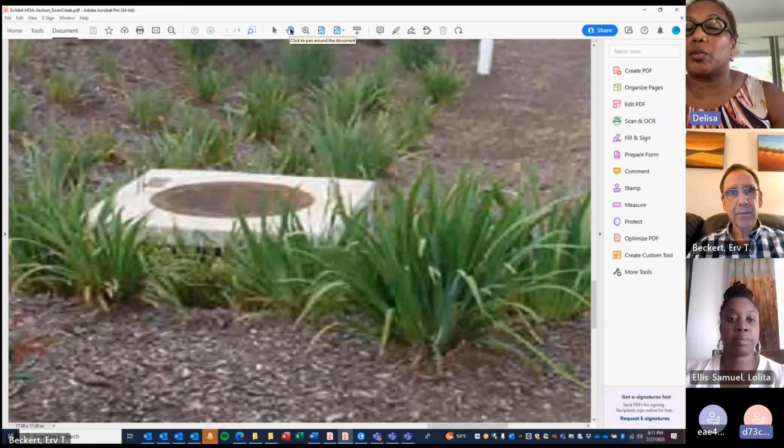Is everything completely sub-ground level? Is there anything that's going to be above ground? Because as the water comes into this collection pond, is there going to be the possibility of any type of debris accumulating there — runoff from the top, if everything is coming into the ground — is there the possibility of debris coming above the pond area?

You did break up a little bit, but I did get the intent of your question — you're asking if, as the water flows in, will there be any possibility for debris to capture in the device. The answer is no, because what it's collecting is water coming from the storm drain system, normally collected from your curb inlets along the curb. So very rarely do we have debris in a roadway system like this.

Now, we do get a lot of debris in storm drain systems that are near a rural area, a rural section, but we do not have that issue with this kind of system because it's only capturing water coming in from the curb system here. That's its intention. It's capturing water off of Fort Washington Drive, and it's also capturing water that's been captured in the storm drain system that we're conveying.

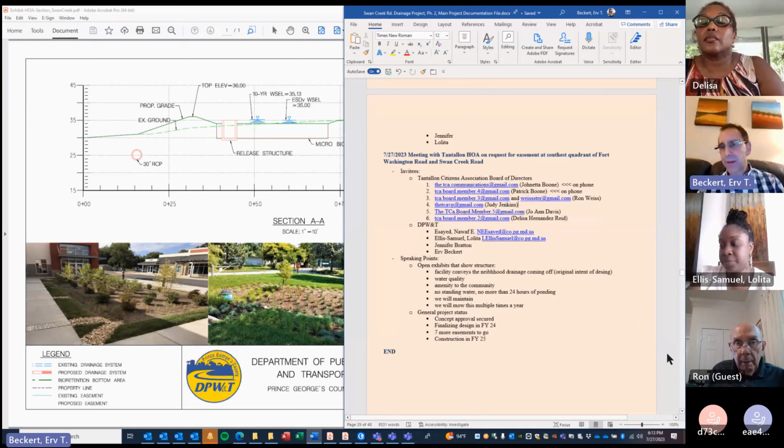All right, so we have gathered here. I'm going to run through the list of folks we have. So we have Miss Johnetta Boone, Mr. Patrick Boone, and Delisa Hernandez Reid, and of course Ron Weiss has just joined us, and also gathered from DPW&T we have Lolita Ellis Samuel. Lolita Ellis Samuel is our right-of-way agent, has been meeting with the property owners and working on acquiring the easement.

So what I was doing, Ron, just before we got started, was showing a picture of the proposed micro bioretention pond. It's a very small facility, about 3 foot in depth, and it is going to collect water at the surface. It will then infiltrate, trickle down through the layers of soil, and it will remove sediment, phosphorus, and nitrogen.

And there were some questions asked: will there be a smell and odor coming from this? And I said no. The treatment that we do occurs down below. We're simply removing phosphorus and nitrogen. We're using existing soil, a variety of different soil types, but this all occurs below the surface. You don't even see it.

The top surface will just be grass. It will literally look like a slight depression off the side of the road. So these are very nondescript facilities. They don't stand out much, which is the way we like them, because they blend well into the background. And we are and will be responsible for maintenance.

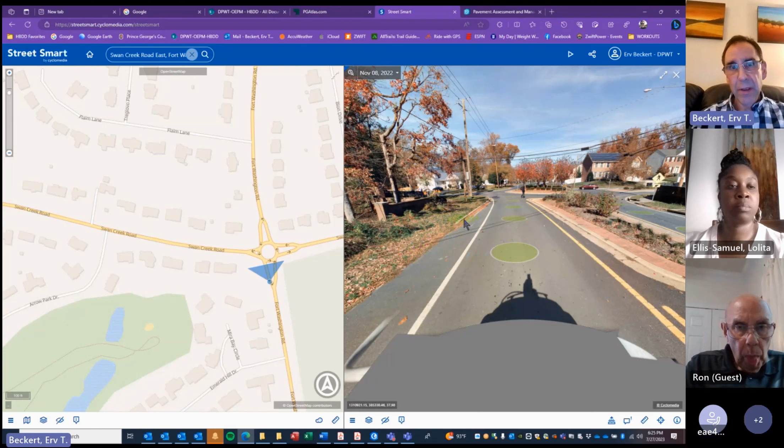The school was required to, and I believe they did do this, provide controls on their property to address drainage impacts from their project. They did so because they have to follow the very same regulations my agency needs to follow. Well, sure, there may be some water that comes from that site because we're right next to the school, but that was not the intent of this structure. They have already provided substantial controls on their property - I believe they put on-site stormwater management facilities there.

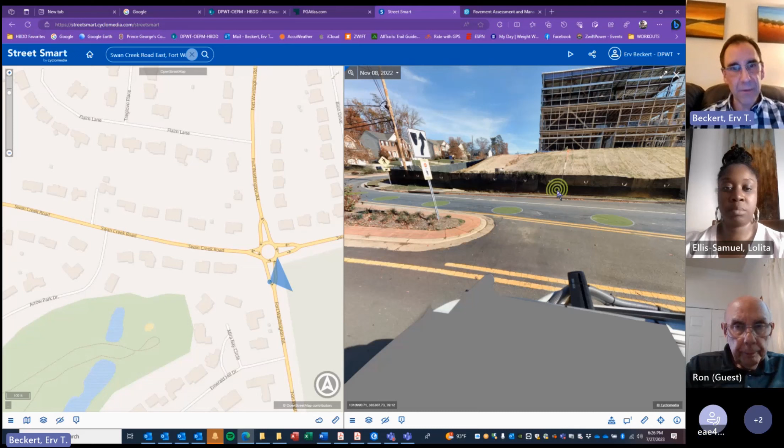What that should have done was address any changes in flow, because you're right - when you clear an area, you open it up and the water concentrates more quickly, and it can overwhelm a storm drain system if it's not captured before it's conveyed. So they were required to provide stormwater management facilities. So what we're doing is... If I could just jump in there. Sure, please.

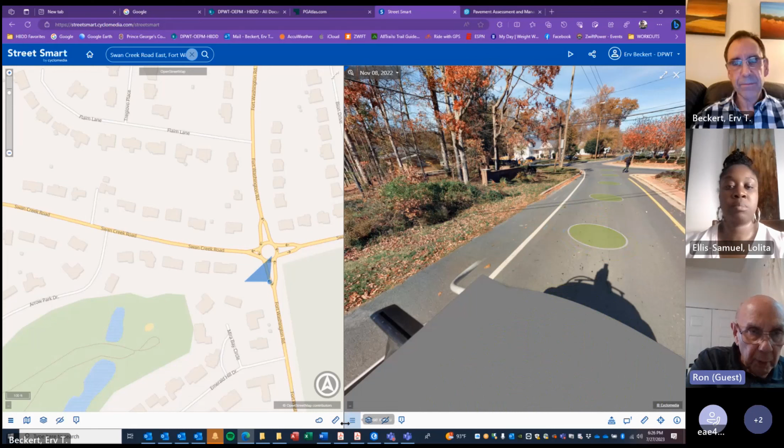They have big underground storage tanks to hold a surge of water, and those tanks drain into a big pipe that goes under Fort Washington Road, behind the houses on the south side of Swan Creek Road, into that pond. That pond behind Flavia Walton's house has been reconstructed to accept the water that drains out of the underground storage tanks.

You'll see those white lines - no, those aren't it. But just south of the triangle extension of the traffic circle, there's a pipe that goes behind our property, probably on the property line, behind those houses, behind 102, and drains into that pond. So the majority of the water coming from that school will flow under Fort Washington Road through that pipe into the pond.

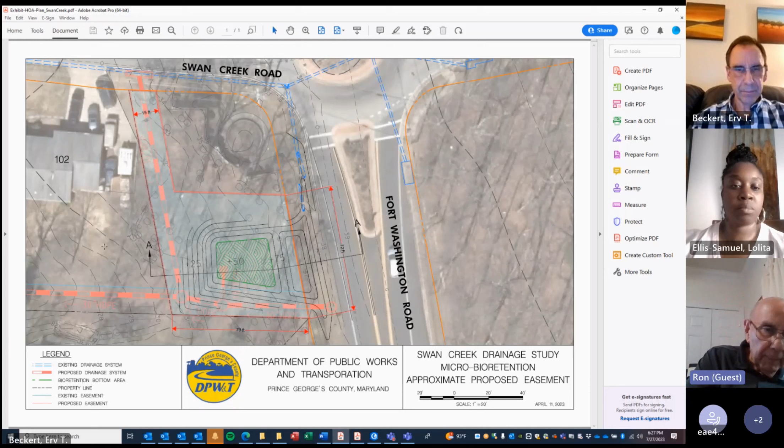One point of clarification, Ron - the water that comes from the school, that goes into our pipe system, does not go into the pond at all. It bypasses it. I'm hovering over it, and I'll change my cursor so you can see it better. You see this pipe here? That is capturing all that water. It does not discharge into this pond - and I'm not talking about that pond, I'm talking about the golf course pond.

Oh yes, sir, understood - I'm not even thinking of that. What you're thinking is the bioretention, yeah, that thing. I'm not calling that a pond, that's your micro thing.

So the water from the school is in fact going under Fort Washington Road into the golf course pond that has been reconstructed to accept that water. Is that true? That is true, sir, yes.

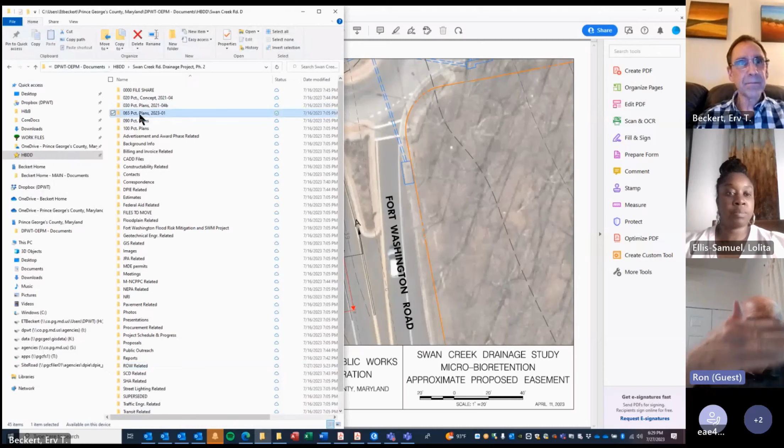Thank you. So this pond has to do with water flowing south from the Tantallon North area, flowing down to the houses on Tantallon, the houses on the north side of Swan Creek Road, and the houses on the south side of Swan Creek Road.

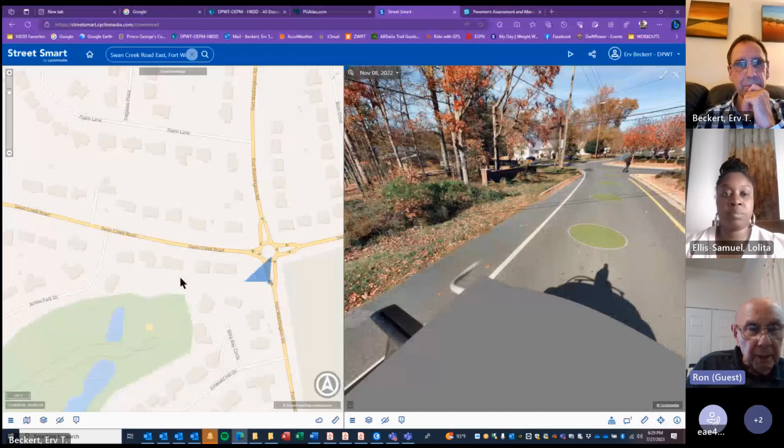Those houses have multiple times had severe flooding and have had to reconstruct their basements. The one house across the street from 102 is now built on stilts to hold it up above the water flowing under their homes. 109, the house at the end of Arrow Park, was ruined and has been rebuilt almost from the ground up because of the flooding that Erv is trying to mitigate with this system. This will certainly have that impact.

Thank you very much, Ron, that was a very good summary. I hope that addresses the question adequately about why we're putting in this facility in relationship to this project, and the context of the school site with the storm drain system. Are there any questions about that at all? Anything I can do to answer, or did we not answer any questions properly before?

I have a question about maintenance. So when you put this system in, there's an installation project - how long is it going to be in place before it has to be replaced, or how are you monitoring the life of this system that's in place? I'm thinking about pipeline projects, something I'm familiar with.

Gotcha. Yeah, so these kinds of systems, because they're underground, we have to go off of empirical evidence for when we repair them. So when I said we repair them between 5 and 7 years, that's when we intend to do it, just because that's the historical life cycle of these structures. It's very difficult to know exactly what's happening to your soil layer below.

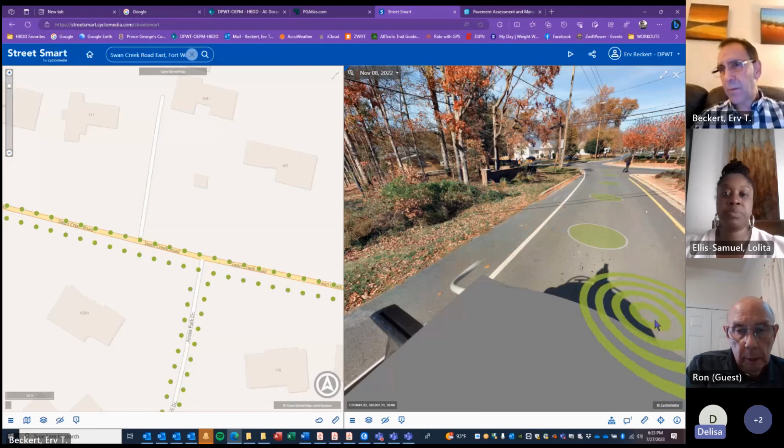So that's why we can say pretty confidently that we will be able to allow that system to work for 5 to 7 years, and then we're going to go in and replace the soil. Does that answer the question? It does, but it also causes a follow-up question - so how...

How much of a construction effort is this for the initial installation? And perhaps, I know we can't say with any true confidence, about repair and having to go in and replace that soil area. So how much of a problem is that going to be?

The first installation will take the longest. The area needs to be cleared and graded, so that's by far the most time consuming part of constructing this. It'll take about 2 months to build because we have to grade it, stabilize it, establish soil and sod, and put in that structure at the downstream, low end.

But once it's built, the maintenance, the replacement of the soil that we would do in 5 to 7 years, that's a much easier effort because by then all the hard work has been done. We just have to drive in there with an excavator, dig out the soil, put in the new soil, then seed and straw, cover it with mat so the soil and grass has a chance to reestablish itself. That only takes a few weeks, probably 2 weeks work at the most, and probably less because this is such a small structure. Does that answer the question?

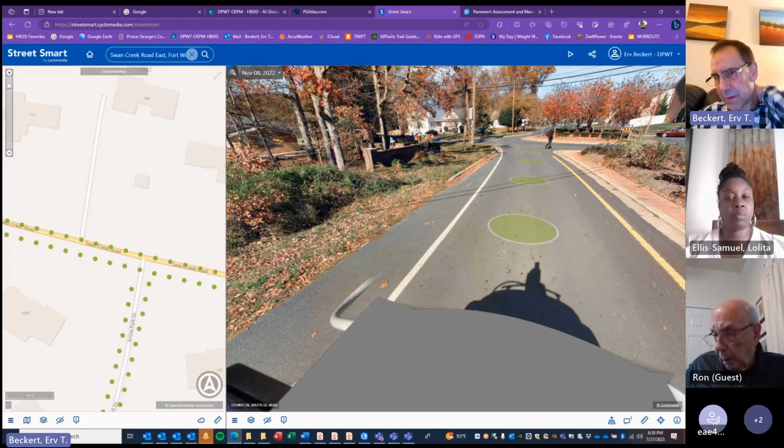So, does that answer the question? That did answer the question. Thank you so much, Mr. Beckert. Right, thank you.

Phase 1 was completed, and one thing you'll notice on the golf course - Ron and I talked about this. There's a great opportunity to do significant work out there that can ultimately help the community. Our Department of Environment is looking at partnering with a private entity called Greenvest to do work on the golf course. They're still studying this. We've been sharing all our engineering data with them so they can determine the feasibility of their project. I don't believe the final project has been approved, but I know they're at least in the concept planning stage, which is very encouraging. It's a substantial project, it's expensive, but because the golf course is such a large open green space, there are always ways of making those work to serve stormwater management needs and still allow the golf course to function.

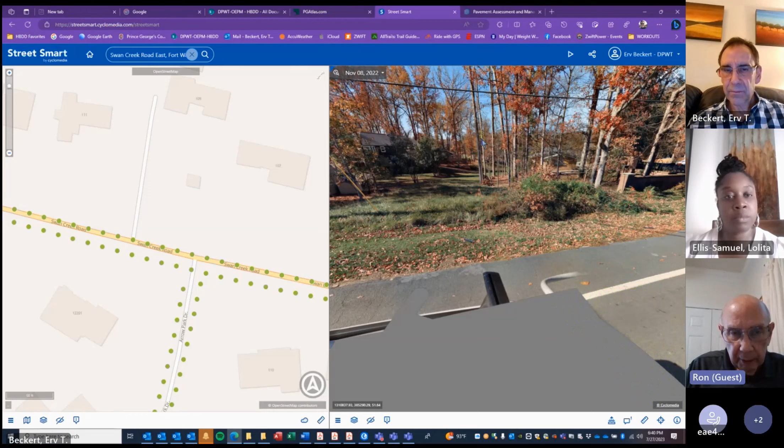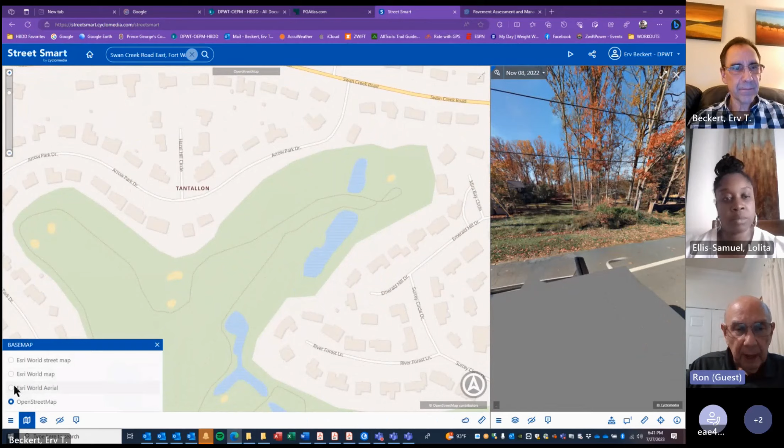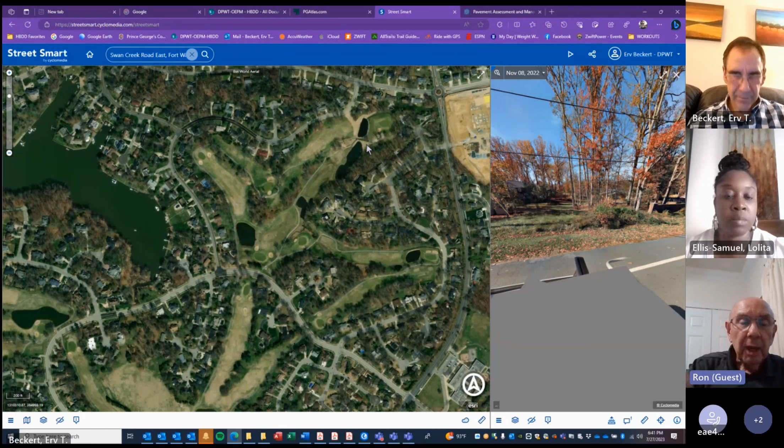Could I add to that? All this water that Erv's trying to manage is ultimately headed to Swan Creek, and in order to get there, it has to go through the golf course. As Erv said, there's a lot of money that's going to have to be spent to fix the golf course to let that water pass through and get out to Swan Creek. So my concern is this all has to work as a system together. We need to get the water from the school and from Tantallon North, under Fort Washington Road and under Swan Creek Road, onto the golf course, and then through the golf course to Swan Creek. Because of money issues, they can't do it all together, so they're doing it in bits and pieces as they find funding. Stop me if I'm wrong.

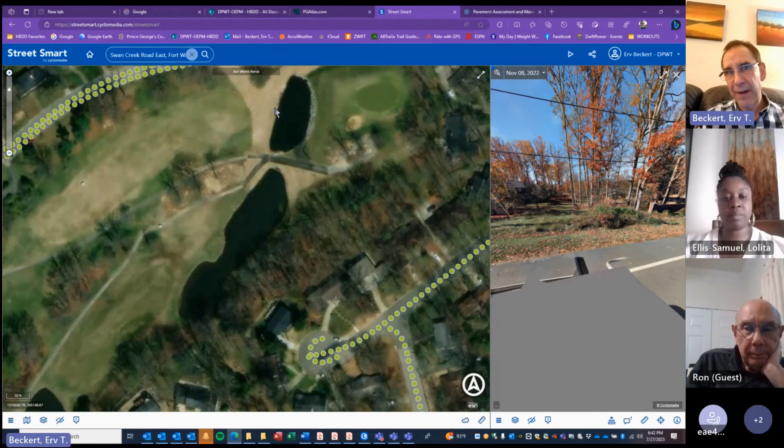That's very correct, Ron. I would just add one additional detail. The thing we were able to do on phase one, which was outstanding, was fix that first pond - we were able to open up the drainage from that first pond into the connecting pond, and that is no small feat. What that allowed us to do was eliminate the backup that used to occur at that small pond. We rebuilt the golf cart ramp and opened up the drainage connecting the two ponds. All the conveyance now goes there, which has a lot more capacity than the small pond at the higher end, allowing our system for phase one and phase two to fully discharge into the golf course without impacting surrounding properties.

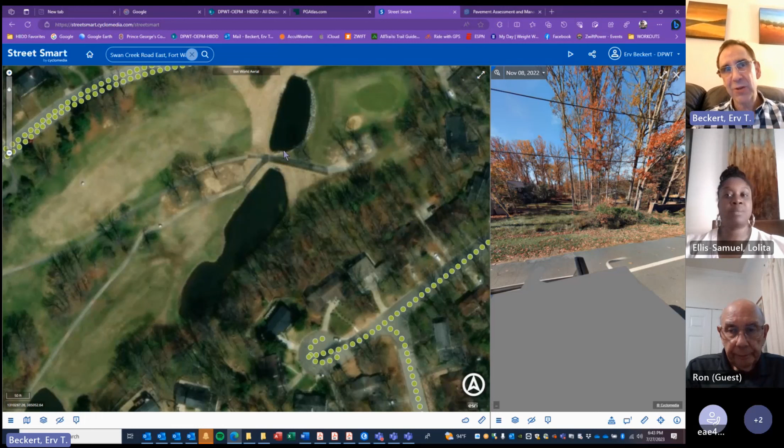It functions fully, it does not back up. We don't have what we call a hydraulic gradient issue, where the water would back into the system. It will not do that because we were able to improve how that golf course pond functions. So there's a lot of work still to be done, but the one thing we did that was extremely helpful was improve how water flows into and through those first two ponds, which makes phase one and phase two so much more effective. We were very pleased we were able to do that, and the golf course worked with us. It took a lot of negotiations with the golf course to get their approval, but they did approve it, and we rebuilt their golf cart path. They were very pleased with the final results, and I think it was a very good effort. But for the rest of the golf course, yes, there are opportunities for getting more water through and collecting more, and that's what our Department of Environment is looking at right now with their project.

Is your project going to help with the rainwater collection in those ponds as well for the overflow? Well, it did, because with phase one we opened things up. Before our work, that small pond on the north side would just back up, and you wouldn't see it, but the entire storm drain system would back up completely - the water couldn't get out of the pipes. So we opened up the connection between the ponds and made the pond a little bigger. We also armored it, putting stone around it since it kept collapsing before, and it would fill with sediment and become extremely shallow, which wasn't helpful to anybody. Now the pond is bigger and deeper, and it conveys drainage much better. So it's greatly improved. Does that answer your question? Yes, sir. All right, very good.

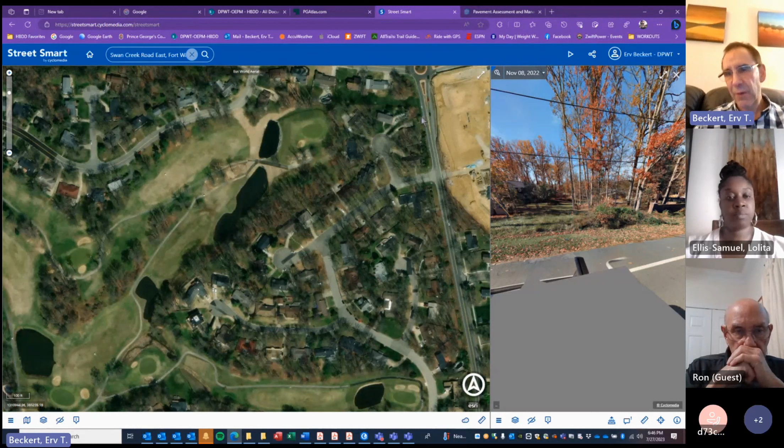Ron, I'm glad you asked, because it's good when we have these discussions that we have context, so you know why we're asking this, because we want to be transparent. We want to tell you what we're doing, why we're doing it, what we can do, but also what we can't do. I don't want to make promises that I can't deliver on behalf of the county.

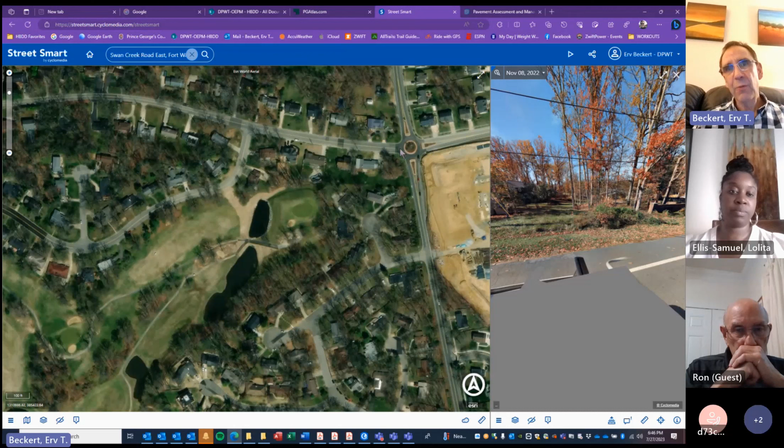We do have a really good project here. Its intention is to prevent the flooding that you've seen in this area for years, and I do believe it's going a long way towards addressing that.

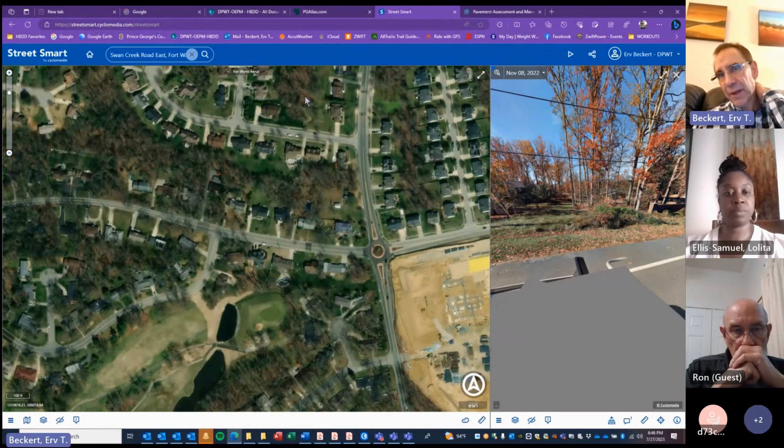Folks, I told you that we were going to do this, and we did do this. We expanded our project to make sure it conveyed and captured adequately the drainage north of Flame Lane. We studied that area and upsized our pipes accordingly, and it does a much better job of conveying

the drainage for this neighborhood than our original design. We did redesign things to improve it so we could do more.

So you've upgraded the design, but you haven't actually put the pipes in yet, have you? Oh, no, I'm sorry, we're a little slow. It takes us a while to do these things because, just so you know, we did get our concept approval.

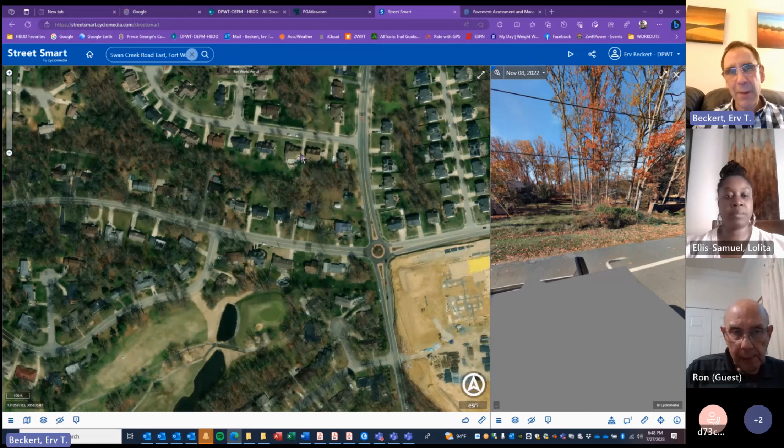That took a little while with our partner agency, DPIE. We got that done, we are now working, we've cleared a lot of the right of way. We have 7 properties remaining - this is one of them - and we are working with those property owners to get the necessary easement rights. People have been very cooperative.

It's still a long process, but they've been very cooperative because this project is about them. It's about improving the quality of their life. It's about improving conveyance, so you don't have water in your basement. So it moves from north of Swan Creek Road to south of Swan Creek Road. That's our purpose - we want to get it out of there and keep this project moving.

So Ron, we expect to be building it in fiscal year 25. We expect to be done our design, get our final levels of approval, and get our easements. Easements take a while because we have to negotiate. We have to show why we need those property rights, and we also have to show the residents what it's going to look like on their property after we're done.

I can assure you, when we're done, that area where we build that pipe will look aesthetically pleasing. You won't know the pipe's there. We will restabilize that area, but it's very difficult to build some of this pipe. These are very large pipes going between - you can just see in the image here how tight it is. So we're going to have to build these very carefully to not impact the properties.

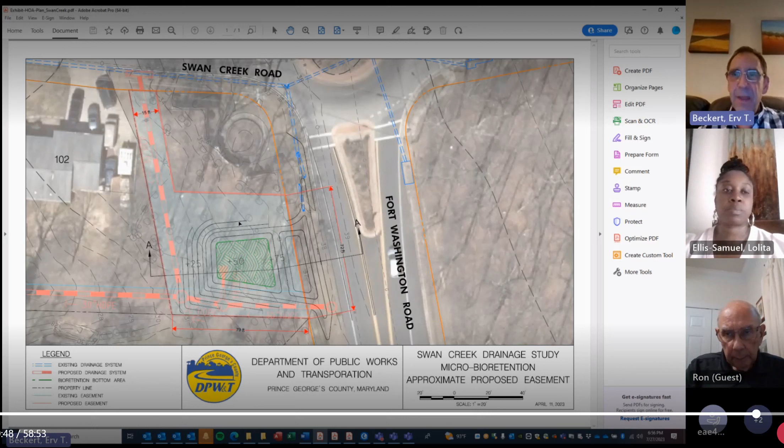If somebody from the board could kindly send me an email requesting the recording, we'll provide that and all the other meeting documentation. And when you send that email, kindly include everybody who needs it, because the way a SharePoint share works, at least with our network, I can only share that link with the recipients of the email. So include anybody who you believe would need a copy, and they would have access to it. Of course, that person could download it and share it further, which is just fine. This is a public discussion, we don't mind you sharing that at all. So please, kindly send me an email, and we will reply in kind.

So that would be Ron, who you regularly converse with. Ron is our point person, and he's the one who would send you the email. Right, Ron? Yes, that's it.

Let me get my slide rule out so I can talk to Erv as an engineer.

Wait a minute, I think I'll get my slide rule out. Anyway, I do have a couple of questions.

You're going to have to take down and clear some trees in order to construct this micro bioretention. Not much. Here's the imagery right here, and you can see that this area is already pretty well graded. It's got shrubs, but I do not see any trees of substance here, and that area will be impacted.

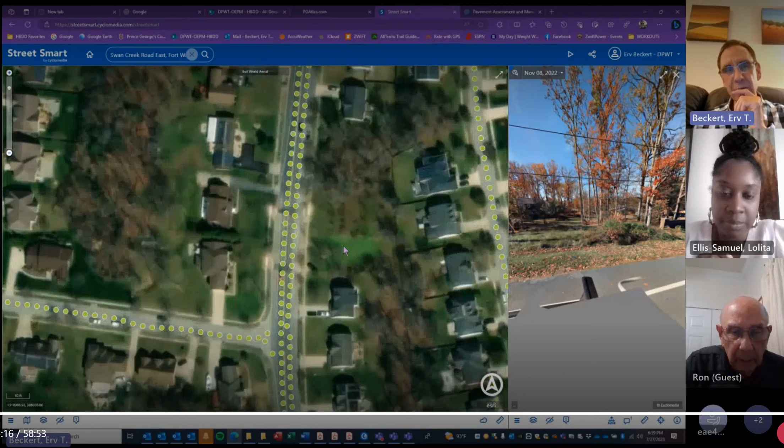That looks like it's a depression, it's all grass. Take a look, I just want to point out if that's similar to what you're talking about. Let's take a look. That does look a lot like what we will have—yes, because you can see a depression here. It is quite a bit larger than what we're envisioning.

I can tell already that's because ours is barely 40 feet by 40 feet. It's pretty tiny, but yeah, it wouldn't be anything more than this. I'm glad you pointed this out, Ron—this is a really good example of what you can expect in that area. It's essentially a rolling hill here; you go down and come back up again, barely noticeable. Now it does have trees around it, but you'll notice it does not have any trees in the treatment area.

Does that help, does it give you what you need? Yes, it does, all right great, thank you. Of course, I'm glad you raised that—that's perfect, Ron, thank you, that was perfect.

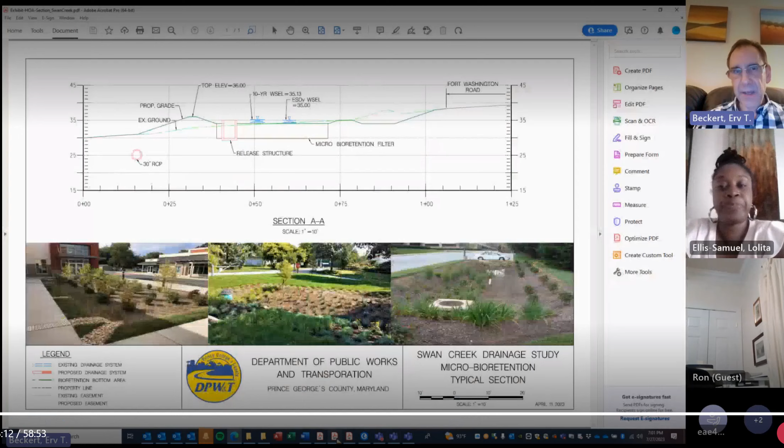So folks, just to recap what we will do: Ron will send me an email and we will reply. We will provide the exhibits we were going over, and we will also provide a list of trees. You can select a variety or several varieties that you like, and we can have those installed as part of the project. Of course, we're happy to meet separately if there are any further questions. We're happy to do that because you folks make time in the evening for us, and we really appreciate you doing so, because it helps us move this project along. I can't tell you how important it is—we can't do these projects without acquiring the necessary property rights. So whatever communication you need from us, we'll provide it. We're happy to do that.

This is for you. That's outstanding—my dad had a slide rule from his younger years. I've never used one myself, but oh my gosh, that's wonderful. So we've come a long way. It gives answers to three places, so it's not that bad. You got it, all right.